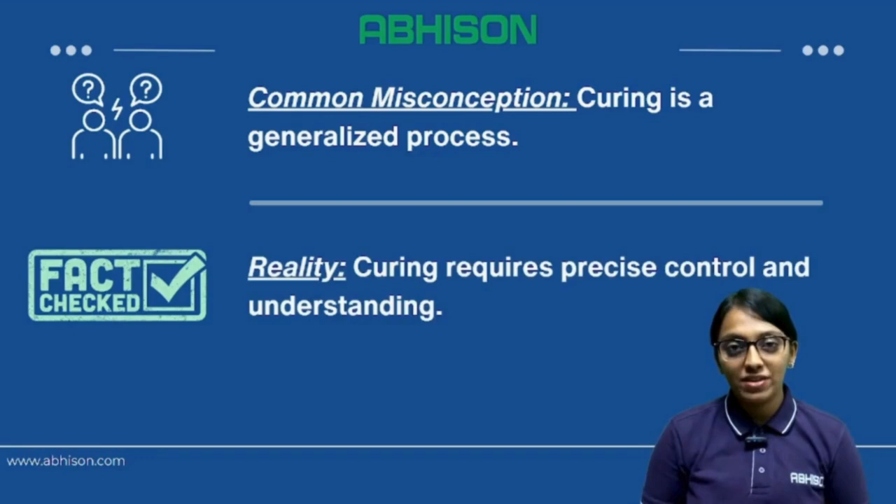Curing is a much more complex process and it requires fine control and a clear understanding of various parameters to ensure the performance of the battery. So let's dive deeper into this and get into the details.

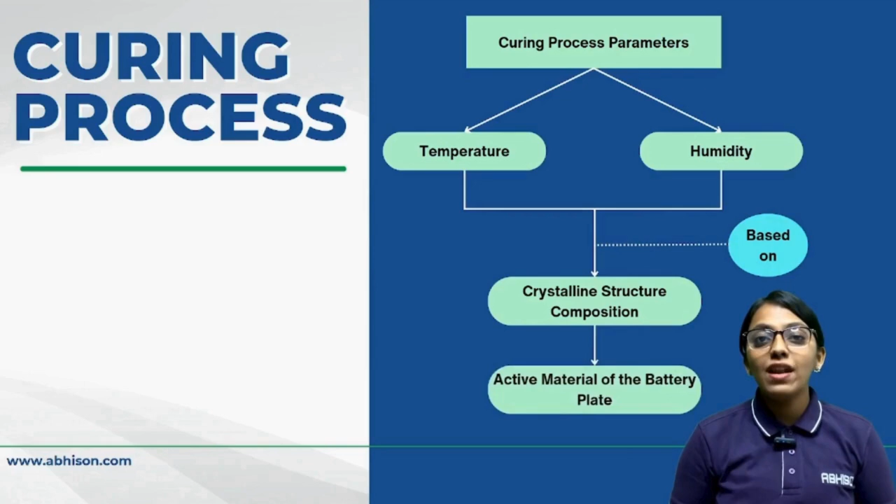The curing process parameters such as temperature and humidity vary based on the crystalline structure composition required in the final active material of the battery plate, and the active material composition should be solely dependent on the application of the finished battery product. For example, the active material composition or crystallization in SLI batteries will be different from that of stationary batteries.

In SLI batteries also, the composition will be different or can be designed differently based on the application. For example, starter batteries in automotive will have a different composition than starter batteries in a boat, where the vibrations are comparatively lesser. And now we will see how the active material composition is determined.

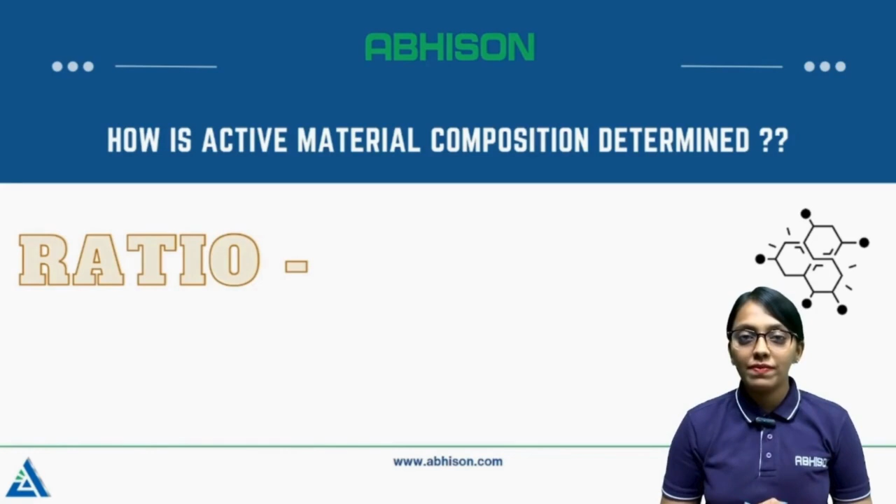The composition depends upon the ratio of tetrabasic and tribasic crystallized structure. Specifically, the ratio between the tetrabasic and tribasic crystallized structure dictates its properties and consequently the most suitable application for the finished battery product. Thus, by understanding these ratios, we can design batteries that meet the specific demands of various applications.

During the curing process, temperature plays a crucial role in determining the type of lead sulfate crystals that form within the active material. At lower temperature, tribasic lead sulfate crystals are formed. At higher temperature, large crystals of tetrabasic lead sulfate are formed.

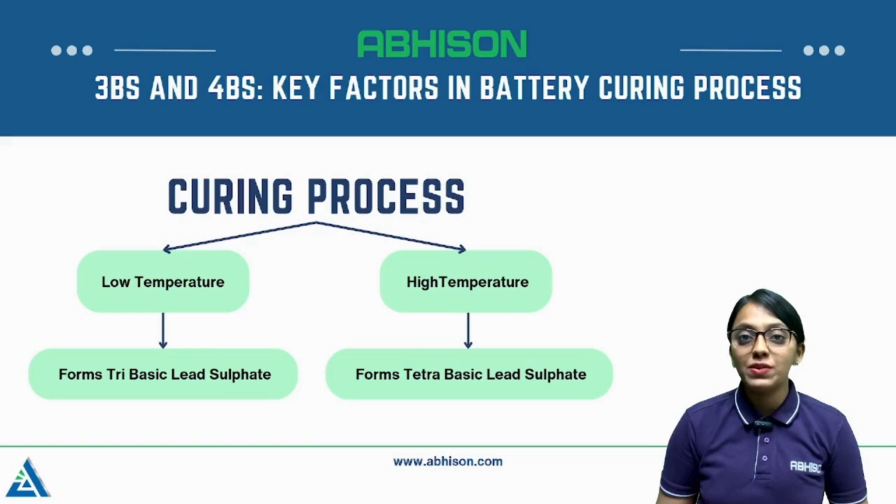By setting a proper uniform temperature during the curing process, you can effectively control the ratio of tetrabasic and tribasic crystal formation. And this control is essential for achieving the desired properties within the active material, ensuring that the batteries meet the specific performance requirement.

The tribasic lead sulfate, known as 3BS, converts to beta lead peroxide during the charging process of battery manufacturing. Similarly, the tetrabasic lead sulfate converts to alpha lead peroxide. The 3BS crystals determine the charging and discharging capacity of the positive active material. But the amorphous and fine nature of the crystal can negatively affect the life of the positive active material.

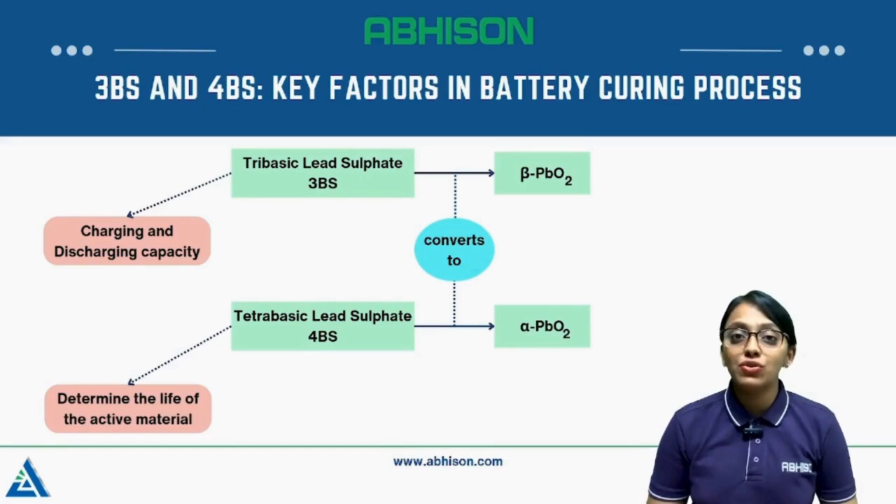The 4BS crystals determine the life of the active material because of their bigger size and harder crystal structure. A good designer can easily get the desired performance in the battery by selecting or changing the ratio of 3BS and 4BS. Coming to the next point, how to design a curing process.

The first step is to determine the application of the finished battery product. Secondly, based on the application, you should design how much proportion of tetrabasic and tribasic ratio is required. The third step is to set the parameters, and finally you need to select an efficient curing chamber. So how to identify a good curing chamber?

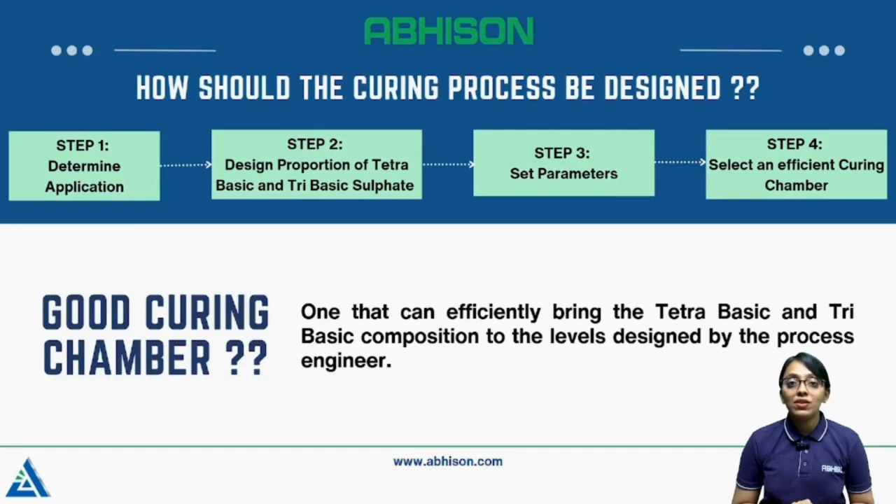A good curing chamber is the one which can efficiently bring the tetrabasic and tribasic ratios to the level designed by your process engineer. This ensures that the curing process produces optimal active material composition for the intended application. Thus, a good process designer first designs the crystalline structure required as per the application of the battery.